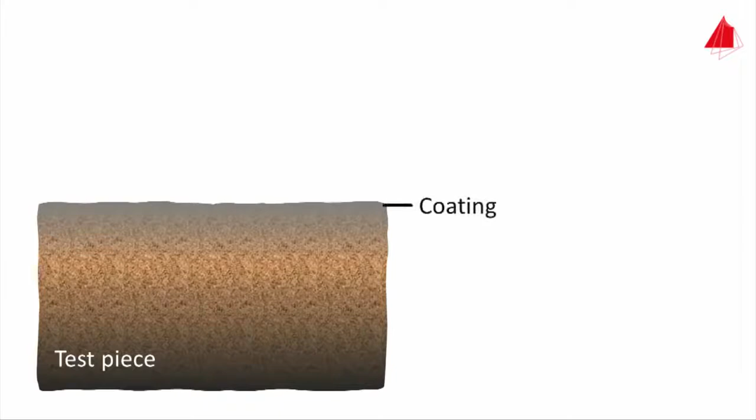Dye penetrant examination is an important method of non-destructive testing of materials. This is the basic principle. Often the surface of a workpiece is covered with rust or paint, which masks the material defects, as shown in the sectional view. Therefore, the first step is always the pre-cleaning of the test piece surface.

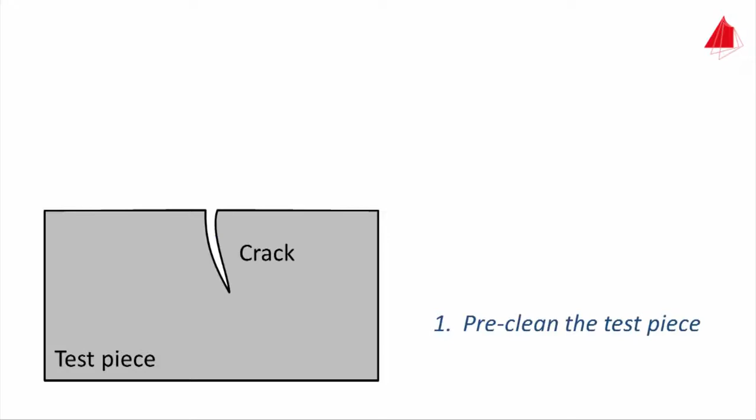This must be done very thoroughly so that any defects present, here it is a crack, are open to the surface. In the second step, the penetrant is applied to the test piece, usually a red-colored low-viscosity oil. Due to the penetrant's high surface wetting capability, it penetrates into the defects and cracks.

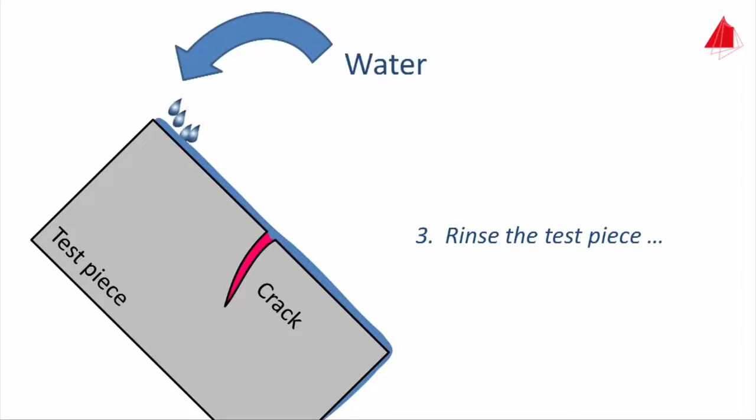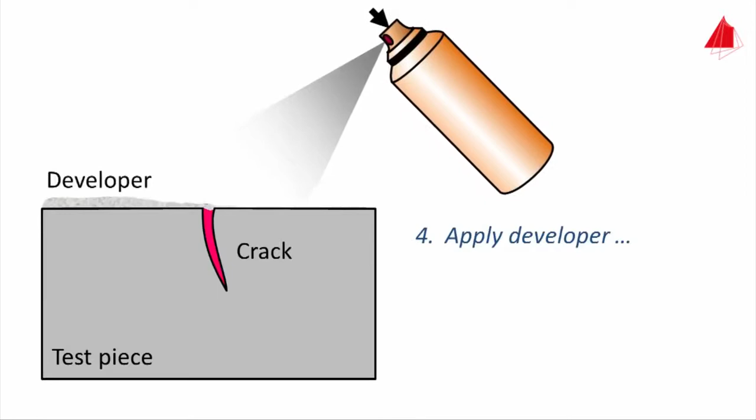After several minutes of dwell time, the third step is to rinse the part's surface cautiously with water. The water removes the penetrant completely from the surface, but leaves it in the crack. Now, the fourth step. After drying the test piece, a developer is applied onto the surface. The developer is a fine-grained white powder suspended in a liquid.

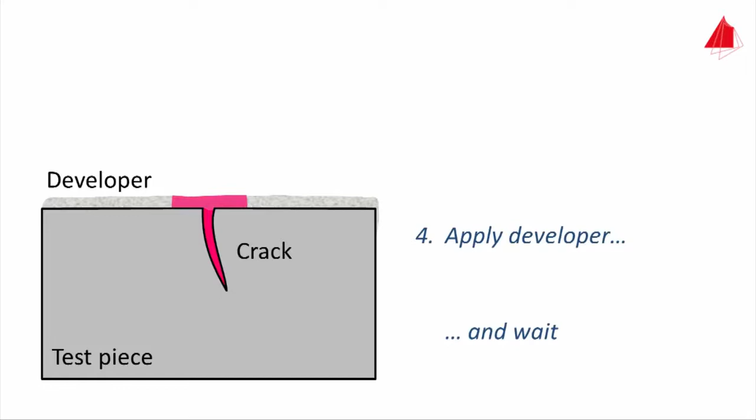It forms an even coating on the surface. After drying, it draws penetrant from the crack out onto the surface. The location of the crack is indicated clearly on the surface. And this is how it is carried out in practice.

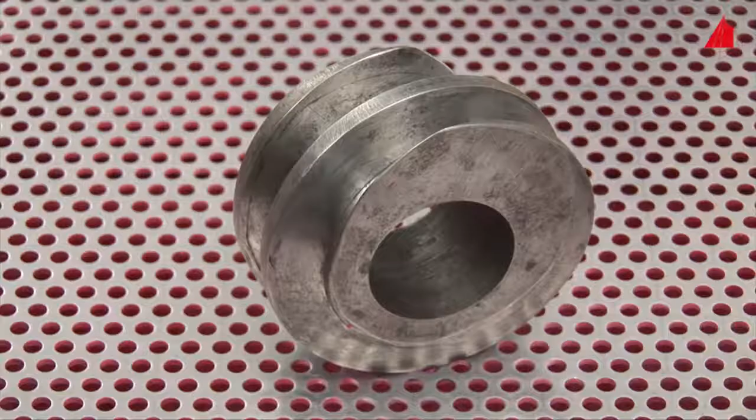We wish to inspect two samples, a segment of a worm gear shaft and a broken bicycle crank arm. Both test pieces have already been cleaned. First in line is the worm gear shaft. The material tester applies the penetrant.

After a dwell time of about 10 minutes, she removes the excess penetrant from the surface by rinsing the test piece gently with water. She takes care not to rinse for an unnecessarily long time because the penetrant is supposed to stay in the defects. Now she dries the surface of the sample with a cloth to absorb the excess water.

As the final step, she applies the developer and lets it dry. That's it. Several cracks are indicated on the surface in deep red color.

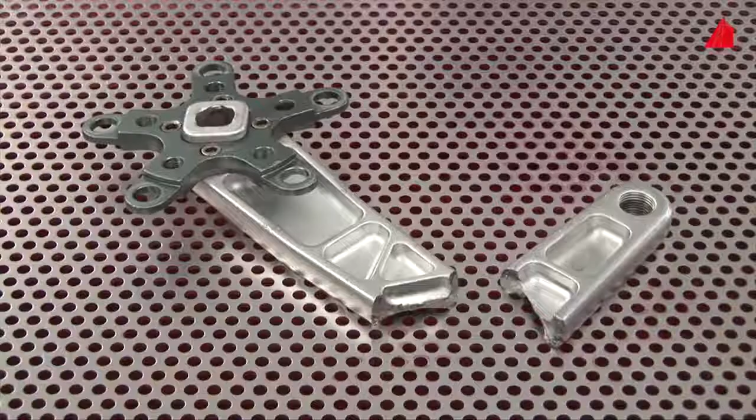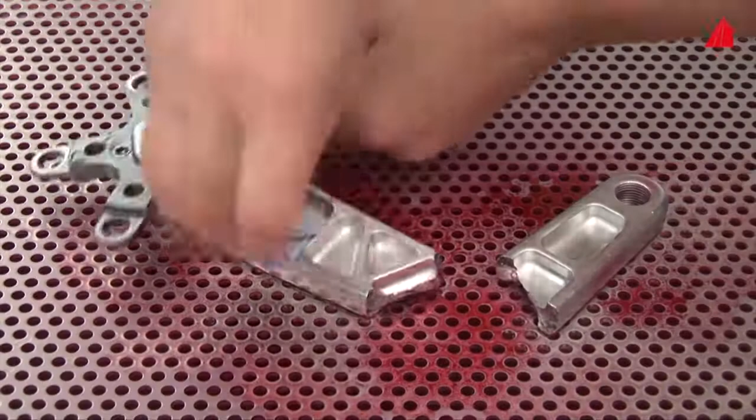Next, the broken bicycle crank arm has to undergo the dye penetration test. Spraying with penetrant, allowing to soak, rinsing, drying, and applying developer. Clearly, additional cracks are indicated on the fragments.

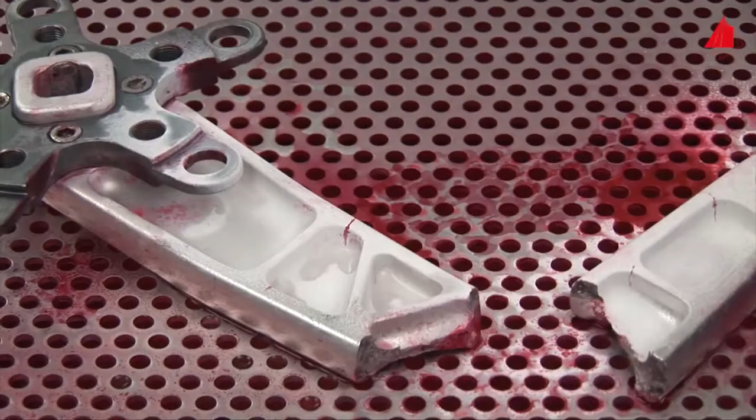Finally, the pros and cons at a glance. Advantages of this test method are: almost all materials can be tested, and the method is simple and low cost for a single inspection. Disadvantages are: only suitable for surface defects. No information about the depth of flaws can be gained, and rough surfaces are difficult to test.